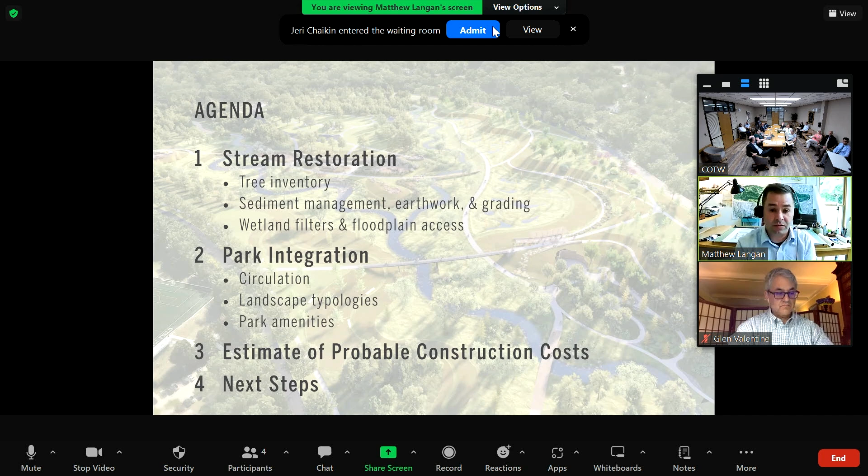Can everyone see the screen okay and hear me just fine? Great. Okay, so I'll go through the first section of the agenda fairly quickly this evening, really focusing on the stream restoration component of the project. Then I'll hand it over to Glen to talk through the landscape integration or the park integration scope of the project, which is really the city's responsibilities on top of the district funded portion of the project. We'll talk a little bit about the current state of the estimate of probable construction costs and give you a sense of what the next steps are, which is essentially preparing for those July public meetings.

To give you a sense of the schedule, on the top of this slide you can see the pre-design, detailed design, and construction phases of the project. We're right in the detailed design phase right now, about halfway through the entire process from start to finish. We've just finished up what we're calling 30% design drawings, basically schematic design drawings to make sure we've got the scope right. That will launch us into 60% design, 90% design, and then final design through May of 2025, when we'll be ready for bid drawings.

Between now and then, we'll have a series of other public forums, likely 3 forums. The next one, of course, being July of this year. Another one likely around December of '24 or January of '25. And then a final forum right around bid time, where we will be presenting the work that has gone out to bid at that point.

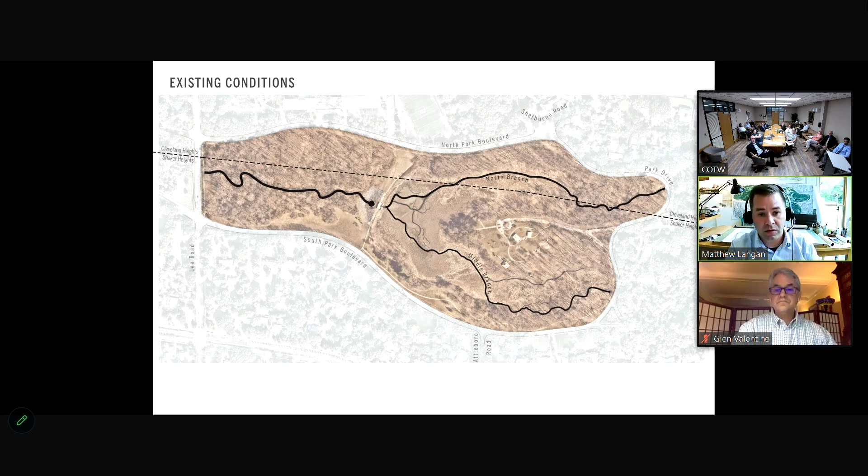To give you a very abridged summary of the history of the project: when the emergency breach was cut into the dam, the lake was drained, and the middle branch and north branch of Doan Brook have been slowly carving their way through all that sediment to make their way to the emergency breach and continue downstream. The reason for our project is to remove the dam, manage that sediment, and then restore the stream corridors in a more final way as part of the leave behind for the project.

As we started into this schematic design, or 30% design phase, one of the pieces of data we received was a comprehensive tree inventory of the entire property. This has been incredibly helpful, not only because it tells us the locations and conditions of the existing trees, but we've started to sift through the data to help inform some of our decision making as we go forward.

To give you a sense of some of those things, one thing we did was isolate either the dead trees or the invasive trees on the property and identify the locations of all those trees. These are the things that aren't providing a whole lot of value to the project at the moment.

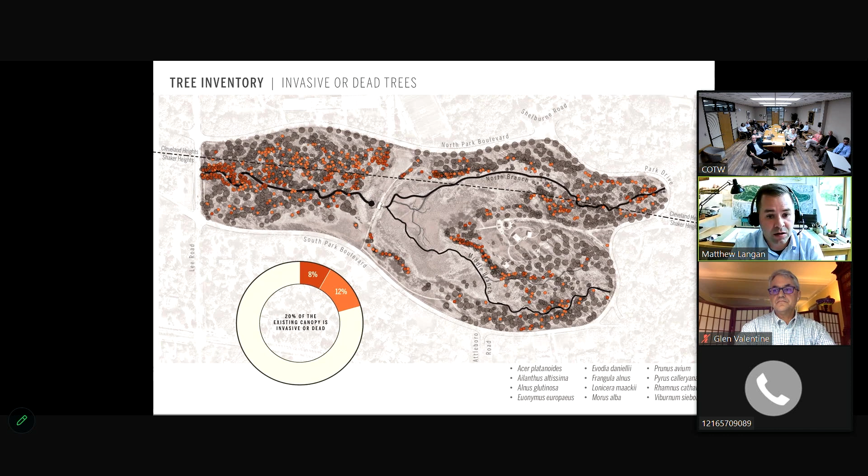So we're starting to think about how we can adjust our limits of work to make sure we're managing these invasive species, and maybe even manipulating some of our alignments to make sure we're preserving some of the important trees on the site, which is identified in this next slide.

We're calling these legacy trees. Essentially, they're trees of good genus or species that are 36 inches in diameter or larger—the big, majestic trees on the property, and there's plenty of them. We want to make sure we're doing everything we can to protect those trees as we go forward in the design process.

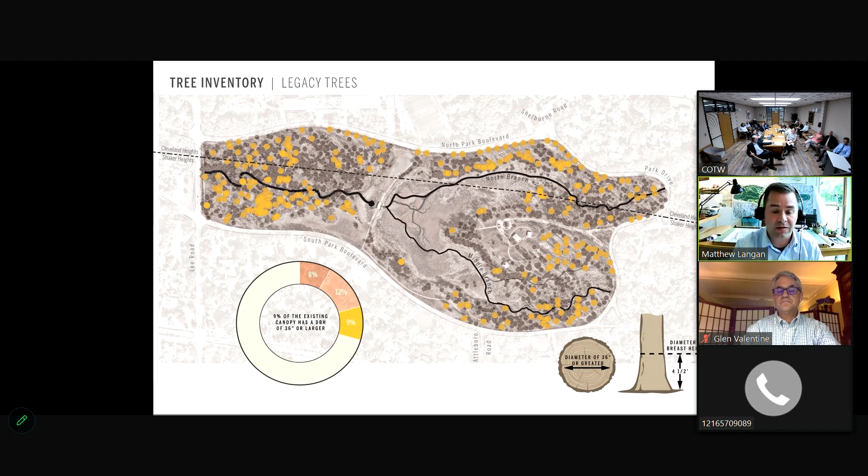We've also used the tree inventory to help adjust the alignment of our proposed alignments for both the north branch and middle branch of Doan Brook. Here, highlighted in blue, you can see that proposed alignment. If you squint at this, it's almost exactly what you saw when we presented the scheme back to you in August of last year. The difference is that this is much more fine-tuned to the existing grade and the existing trees on the site.

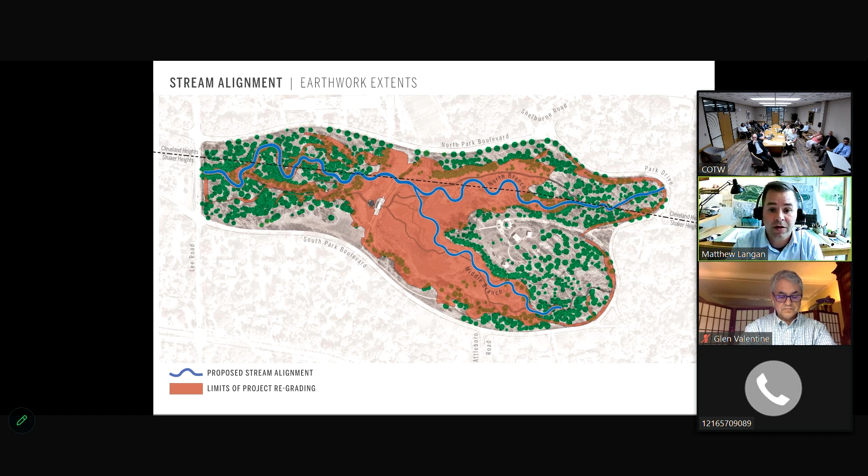What we didn't share with you last time, because we didn't really have a full picture of it, is the extent of earthwork required to restore the north and middle branches of Doan Brook through this impoundment area. What you can see here, highlighted in red, is the footprint of all the regrading that needs to happen to accommodate the stream restoration project. And as you can see, it's pretty substantial.

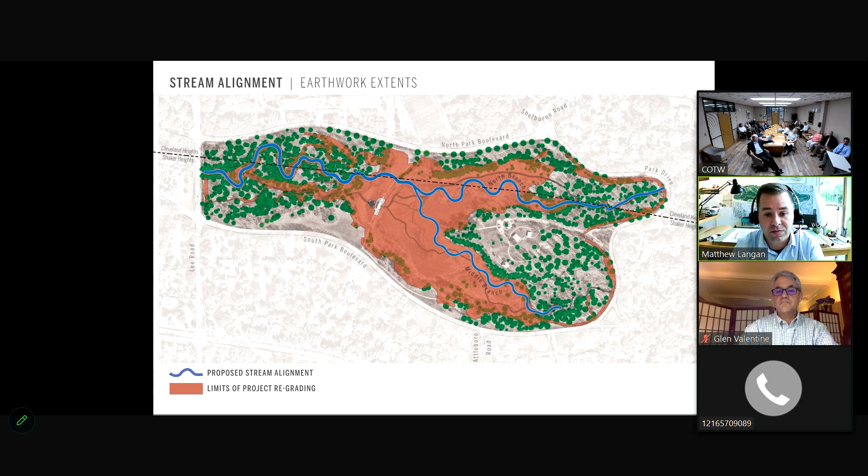If I can remind you from last time, the primary reason for that is there's over 180,000 cubic yards of sediment that have settled behind this earthen embankment that have to move out of the way to enable the stream restoration project. So we want to take all of that sediment, highlighted in these red areas, and make sure we're getting it out of the way of the stream restoration. We're harvesting that sediment or soil and moving it into these orange areas to make way for the new stream alignment.

The other thing we have to do is remove some trees. The tree removals required are really along the edges of the old lake, and this is also, not coincidentally but very strategically, the area where we have a lot of those dead or invasive trees. So we're trying to be as sensitive as we can to not remove trees that are generally in good health or condition. We're really fine-tuning our strategy to minimize tree removals to trees that aren't already providing good benefits to the community.

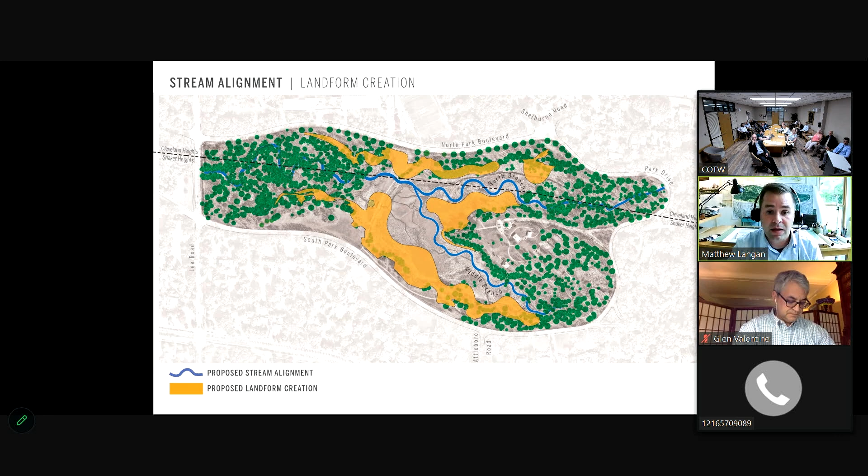So once we remove those trees, that will allow us to move all this sediment around into these orange areas. And once we do that, that really becomes the basis for the overall park design, where we're making room for the stream restoration to come through the center of the park.

That's really the basis for the function of the park as part of the urban hydrology. The form of all that moving the sediment around allows the stream to function as best as we possibly can.

To illustrate that, here's what we're calling a typical summer rain shower—anything less than an inch of rain in a 24-hour period. If I toggle back and forth, you'll see the stream starts to fill up to its banks in a small storm event, and you can see some little squiggles along the edges of the stream as well. Those are wetlands, and we'll look at those in more detail in just a second.

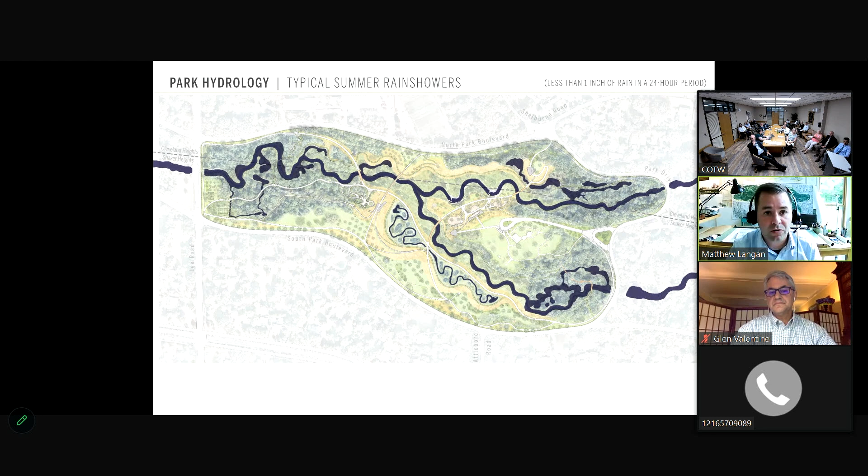If this is a typical summer rain shower, here's what we're calling a one-year storm event—basically the probability of a storm this size happening in a year. If I toggle back and forth between a typical summer rainstorm and a one-year storm, you can see the footprint of that blue area is quite a bit bigger, and that's strategic.

What we're trying to do is get the stream to come out of its banks and access this big, vast floodplain that it hadn't had access to previously. You can see that footprint grows in a one-year storm event, grows even more in a 10-year storm event, and grows even further in a 100-year storm event.

This is all by design, and all of that earthwork we had to do to make way for this is really the core of this project. It's allowing the stream restoration to happen, and it's allowing the stream to access this vast floodplain throughout the 60-acre park area.

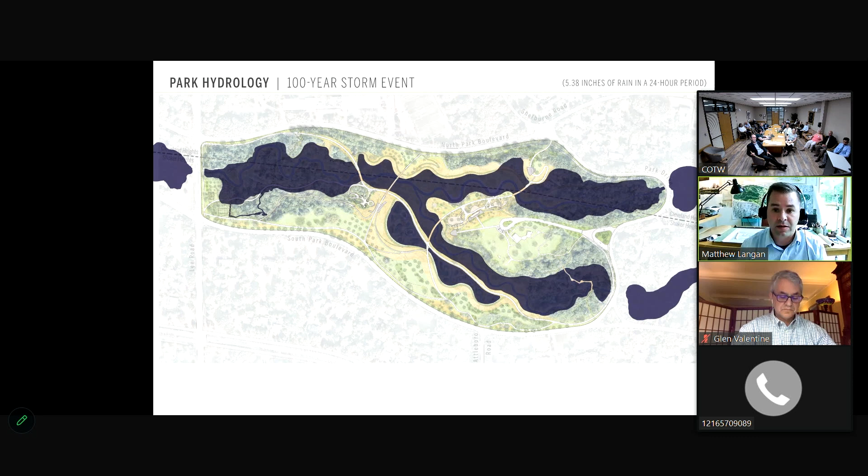The other thing we're really excited about, which we didn't provide much information on last time because we hadn't developed the idea yet, is wetland filters that intercept existing storm pipes bringing rainwater from the adjacent neighborhoods and outletting it directly into the middle and north branches of Doan Brook today.

That water used to sit in the lake and get overflowed over the dam during storm events. All of that water coming into the site today is unfiltered. These dashed lines represent those existing pipes that are sticking out into the park today, letting stormwater from the adjacent neighborhoods come into the site.

What we're proposing as part of this project is creating constructed wetlands along the edges of the park where those pipes outlet into the stream, to filter that water and allow it to get cleaned up a little before it ultimately makes its way back into Doan Brook. These are kind of the lungs of the park that are starting to evolve here.

What's really exciting is that it's allowed us to take the park design and infrastructure design and expand it both into Cleveland Heights and Shaker Heights, taking advantage of all the urbanization that has happened and allowing the park to provide a service back to the community as part of our design process.

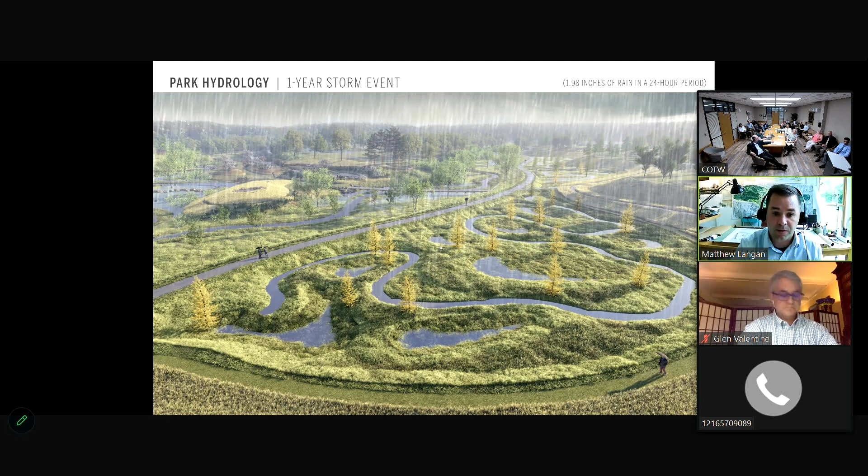And then a 10-year storm event, you can see those little pockets start to form little pools and oxbows from that swale. And then the 100-year storm event, the entire footprint of the wetland system is inundated and will drain slowly over a short duration after a storm event, giving that water a controlled release back into Doan Brook, because Doan Brook is also pretty full of water at this major 100-year storm event. We want to control the release of this water back into the brook so it can continue downstream out to the lake.

What's exciting is now we have two completely separate water systems happening in the park. On the left-hand side of this shared use path is the upstream Doan Brook, conveying water from all of the upstream communities east of us through the park. And then the wetland systems are taking the water from Cleveland Heights and Shaker Heights, slowing that water down, filtering it, allowing the other water from upstream to pass us before delivering it back into Doan Brook.

This is all by design, and you can see it's going to start to set up our entire park experience as we go forward. And so with that, I'm going to hand it over to Glen Valentine to talk through a little bit about what that park experience is starting to shape up to look like.

Thanks, Matt, for that explanation of the hydrology and topography of the park and the management of the sediment. All of that sediment management creates those kind of landforms that Matt was describing. And what that allows us to do is create a wide variety of different habitats within the park.

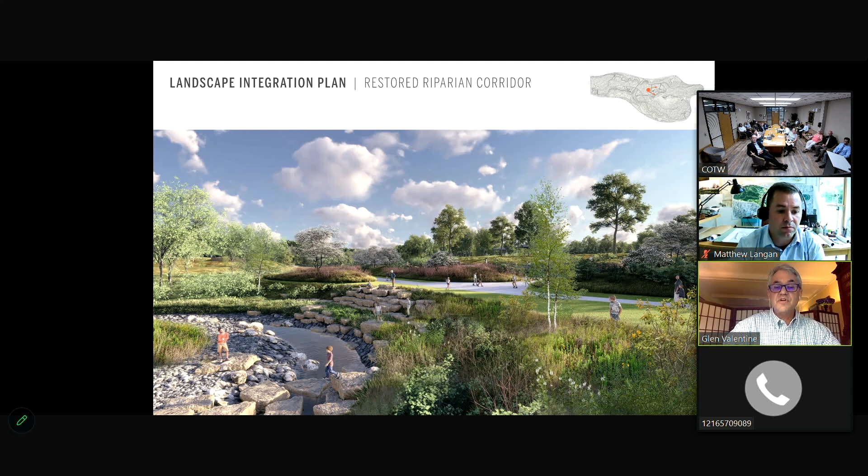It's also designed to give you a new perspective down on the water. You're going to be looking down on one of the most active areas of Doan Brook, one of the steepest areas, although it will still be quite gentle. You're going to see a lot of movement and activity in that water below the bridge.

Now we're going to add one more element: the transformative effect of hydrology with different storm events in the park. The other element that's really key to us is time, and this is the time for the landscape to evolve. This image here is 1 to 5 years — very low and open with a lot of meadow grasses and small shrubs and trees in the park. But if you advance forward 20 years, you can begin to see what it will look like.

Before we jump ahead, I should note that the stream restoration process, including the sediment management, the constructed wetlands, and actually this pedestrian bridge and the shared use path, are all pieces of the district funded portion of the project. So everything you've seen so far in this presentation is part of the district project. We'll make sure to acknowledge when we shift gears and move more directly into the city's scope of work.

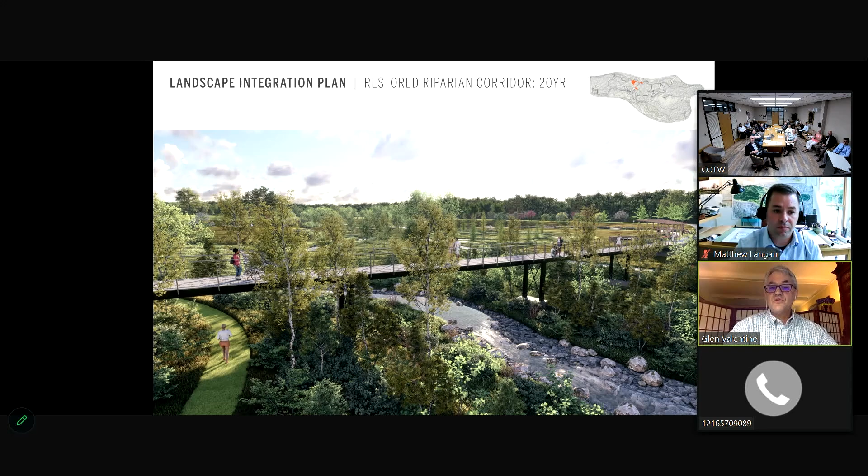Here's the landscape integration plan again. The reason we're jumping back to this is now we're going to zoom into a couple of details about circulation and then take you on a tour through the amenities of the park. This is the time where, as Matt mentioned, we switch from the program of the district and the management of the restored stream corridor to the amenities that the cities have asked us to design and begin to envision.

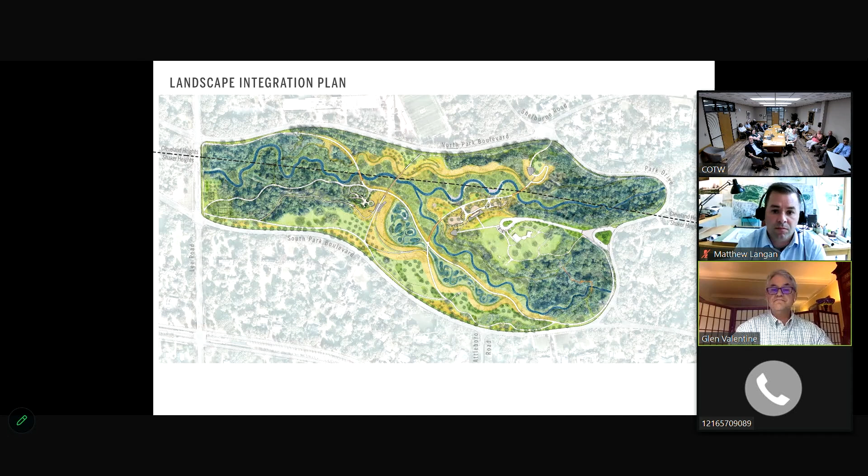We're going to start with just looking at the circulation. Based on those landforms that Matt mentioned, the management of the 180,000 cubic yards of material from the lake, we've created these promontories along both the north and south edges of the park to hold and keep that material on site. Those also serve as gentle ramps that allow circulation systems to get from South Park and North Park down into the restored stream corridor and to the park amenities themselves. These are critical elements for a lot of different reasons, but they really form the backbone of the circulation system and allow that transformative experience of going from high to low and engaging with restored Doan Brook. Thanks.

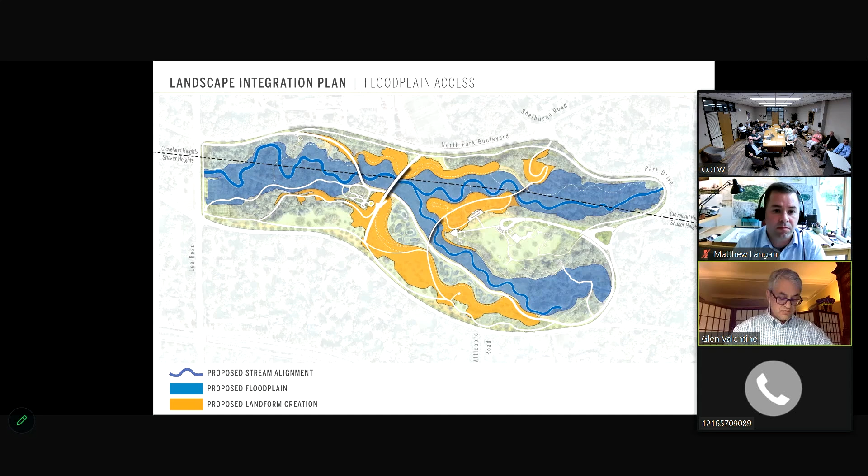Each one of these major circulation systems reaches the edge of the park. As it reaches the edge, we've designed specific park gateways at these critical junctures with the adjacent neighborhoods. Each gateway will have a suite of elements allowing visitors to rest, get oriented, and enter the park, feeling welcomed. There will be bike racks and benches, and we'll show some examples of these park gateways in just a second.

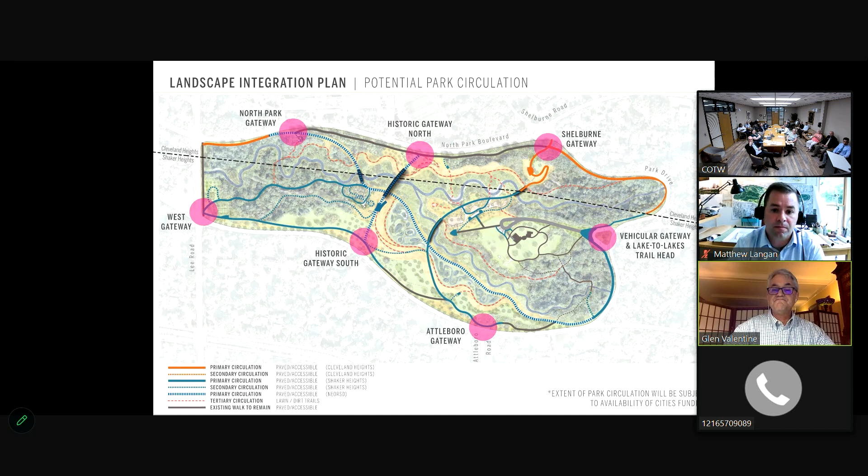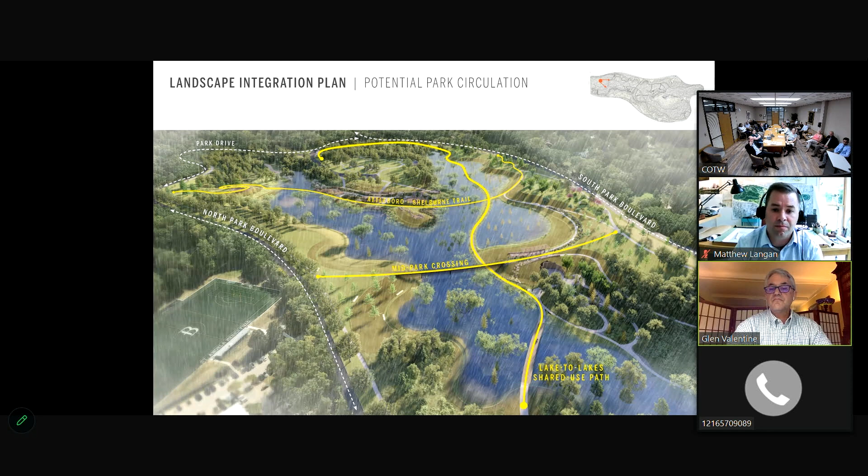Glen, how much longer do you think you have here? I want to make sure people have time to ask questions. We have probably 10 more minutes. Is that going to be all right? Can you make it 5 so we can get into question and answer? Yeah, thanks, we'll make it fast.

So we're going to run through the amenities very quickly here. These are the amenities, and we're going to start from east and move to the west.

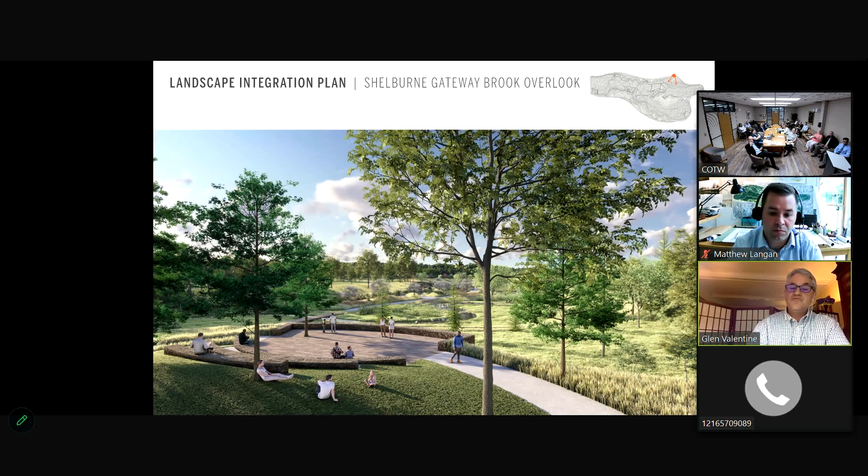The first one is the overlook at Shelburne, another one of those community gateways. This was selected because it's the highest point in the park and gives those long views. It can also be used for community gatherings and informal events.

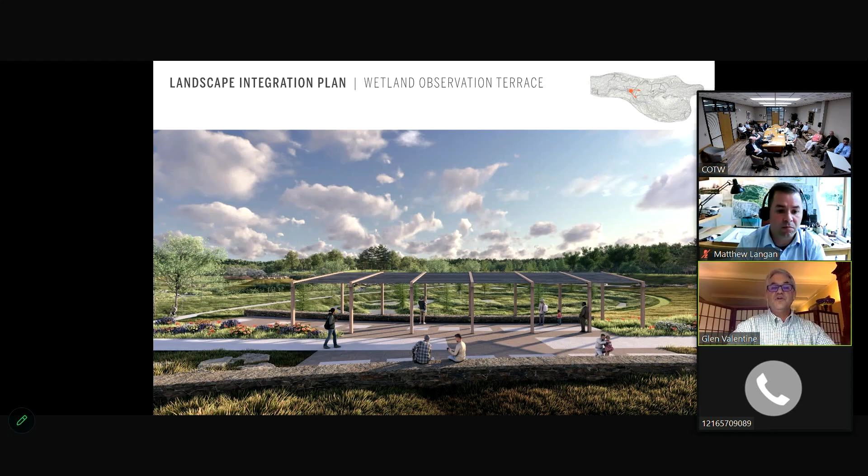This is an overlook arbor. It sits on the landform of the former dam. It overlooks that wetland and really becomes a key place to watch this very dynamic stormwater feature, as Matt was describing earlier, as it goes through its transformation with each storm.

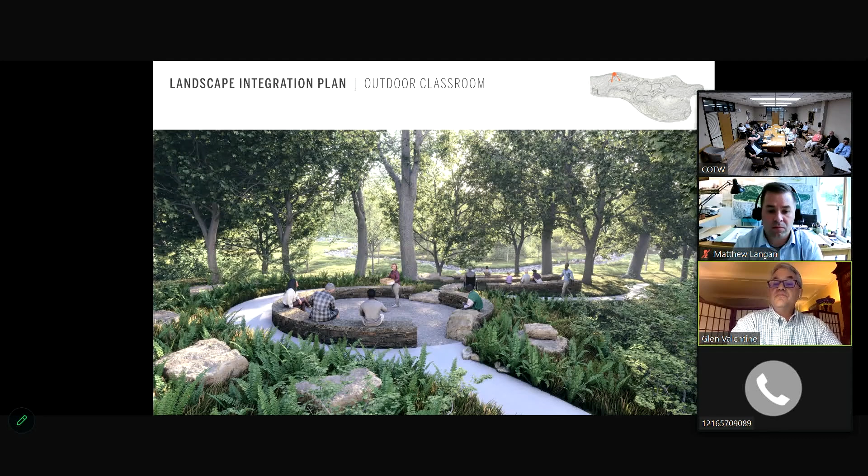This is the outdoor classroom, next to the Beaumont School. It's designed to be two spaces: one is a kind of council ring for orientation, designed for younger kids, talking about all the layers of the ecology of the forest. The other is an outdoor amphitheater with long views into the existing wetlands and mature oak trees, inviting exploration for kids.

I'm going to hand it back over to Matt very quickly for some costs.

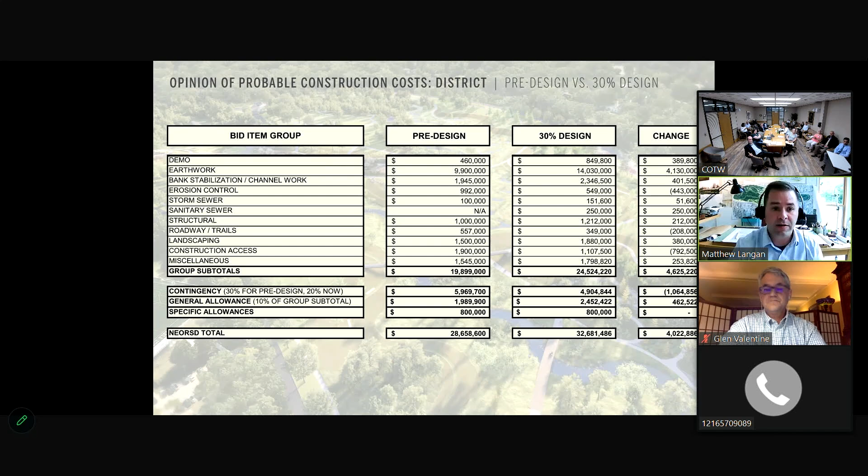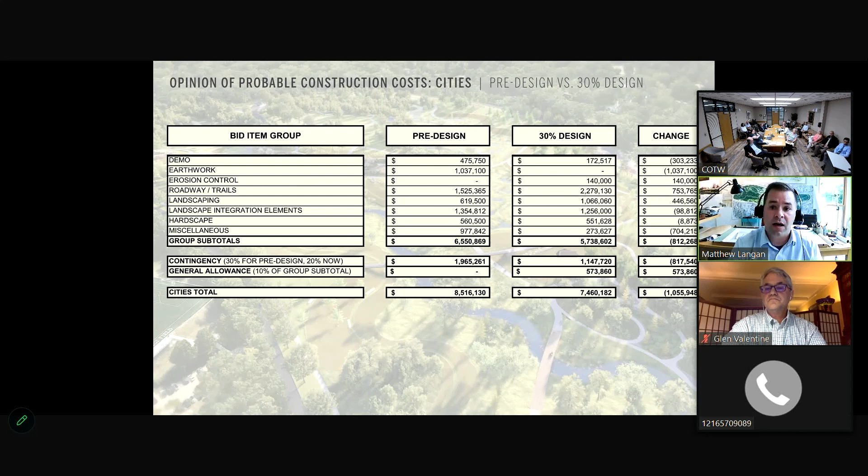The last thing I'll note here is that when you compare the district scope of work on the left-hand side, that's basically the limit of work for the major earthwork on the project.

That is essentially the area that the district will be working in. And on the right-hand side, you can see the city's scope of work. A lot of it falls along the edges of the park, but then it goes down into the stream valley and makes those connections with circulation to some of the other amenities Glen just mentioned.

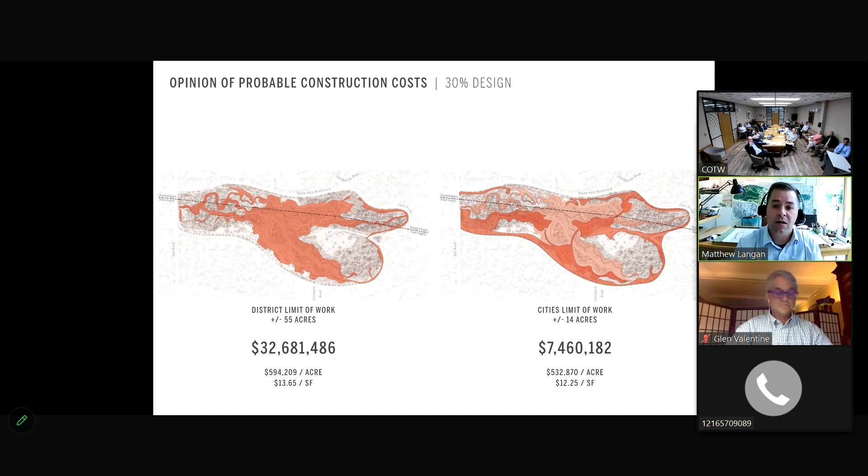We're feeling really good about where the costs are sitting right now. We've got some work to do to bring those earthwork costs down for the district. But that's essentially the summary we have for you this evening. I'll end by noting that we have those public engagement meetings coming up on July 15th and 16th, which we're really excited to provide this update on.

Well, thank you. Very impressive presentation. I see you guys are in the middle of this thing now, very exciting project. Questions? Councilwoman Larson.

Thank you. I'd like to know if the circulation has been built in so well to this design that you don't expect to have to do periodic sediment removal?

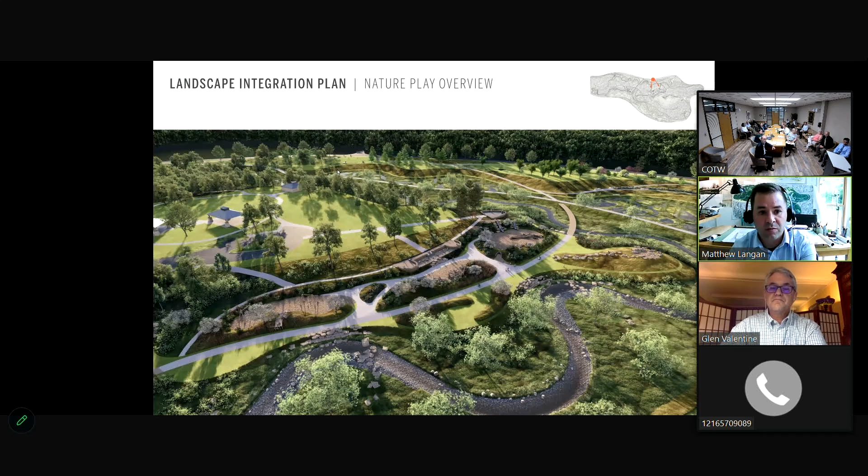That's a good question. The shared use path, let me back up to a slide where we can point that out. The shared use path, which comes diagonally through the site, is also designed for maintenance vehicles, and those vehicles will provide access to the places where we think sediment is going to build up, whether it's in the wetland systems or in the stream. We're providing that accessibility for maintenance vehicles to accommodate that, so there won't be anywhere near the level of sediment that's happening in the old lake bed now.

But there are some spots in the park where we are strategically designing vehicle access to make sure they can be maintained, both by the district within the stream corridor and the wetlands, and by the cities for the park amenities along the way.

Thank you. Yes, Councilman. So the city cost is 7.5 million, and I assume that's shared with Shaker? That's correct. That's the total cost that would be shared between the cities.

And I'm sorry, but I think we're a third of that. Does anybody care to clarify? 65% for Shaker, 35% for Cleveland Heights is what's been discussed. Keep going.

Is there another piece to this with Lower Lake, or is this totally separate? These are two separate projects. Same stream corridor, but two separate projects that were underway. And Lower Lake is about a year or so behind in terms of schedule.

Okay, great, thank you. Other questions? I would quickly ask, you showed a bridge at one point. What was that bridge, or what is that bridge going to be made out of? Yeah, so that bridge, if you can see my cursor, is...

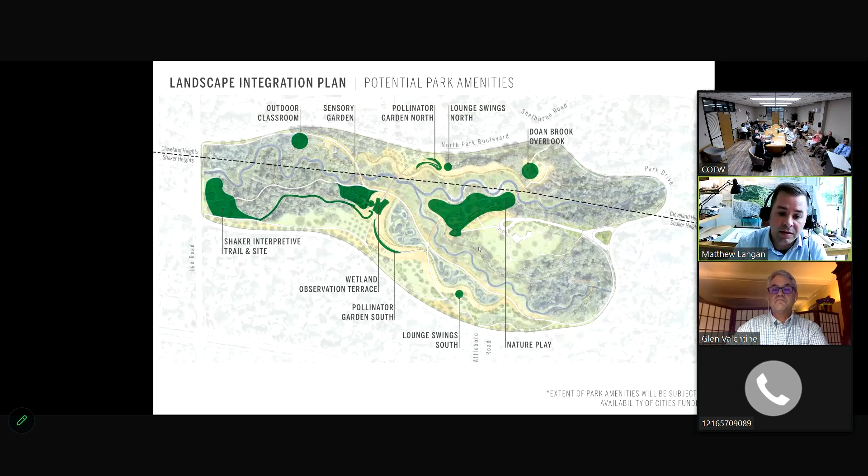...remaking the connection across the earthen embankment where the emergency breach happened. That bridge is a pedestrian bridge, and the materiality of it, if I can go back to that view, is going to be a steel structure with a wood deck. You can kind of see it in these views here. It's a little hard to see, but we're showing a wood deck on a steel structure, and we're trying to make that railing as transparent as possible so you can see right through it to get the great views up and downstream.

And this will be part of the district scope of work. This is something the district has committed to, rebuilding that connection between the communities.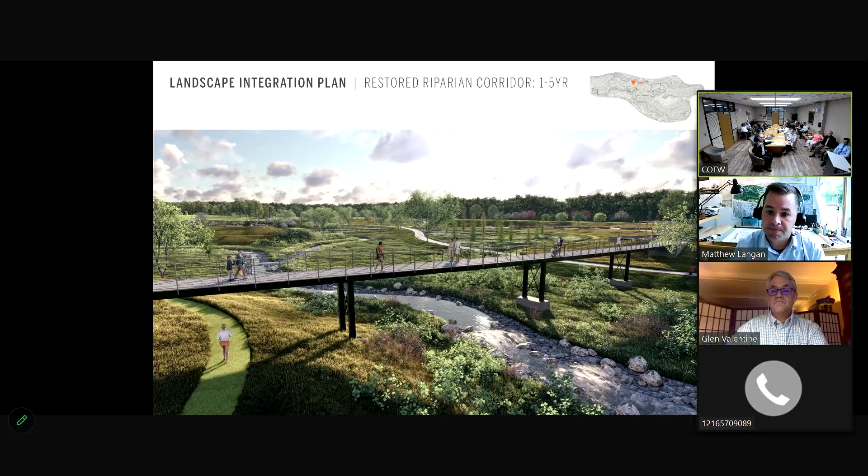And what about the path? I couldn't even tell you which path. It wasn't one of the concrete or asphalt paths, and I saw that there were some grass paths, but then there would, maybe that, what's that mean? Same thing? This would also be a wood boardwalk that crosses the shared use path.

This is an image of a district funded piece of the project as well. So that boardwalk would actually be the district's responsibility, but there are two other boardwalks a little further afield that would be the responsibility of the communities, and those are embedded in the circulation costs.